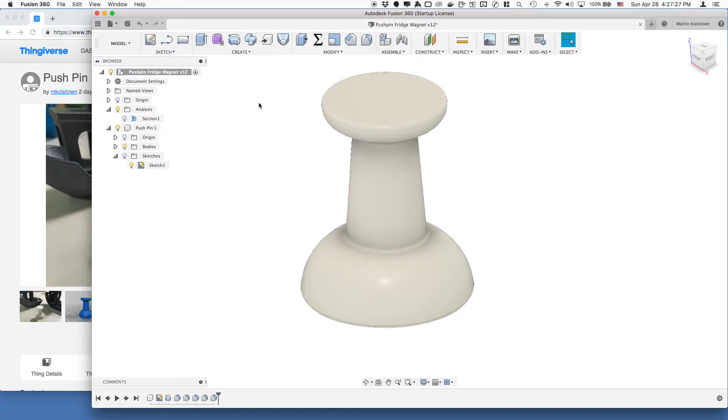So this is it. As you can see, it looks like a pushpin, right? It's a little bit larger than a normal pushpin, about 1 centimeter across the base, and a little bit more for the height. But here it is, it's extra large. This is a cross section just so you can see how it works.

So it's just a bunch of PLA or PETG, and there's a cavity here where I will insert a magnet. I've modified my G-code to stop when it gets to this point, and then I push in the magnet, let it resume, and it builds the rest of the pushpin, and it works great. I've got about a dozen of them on my refrigerator now.

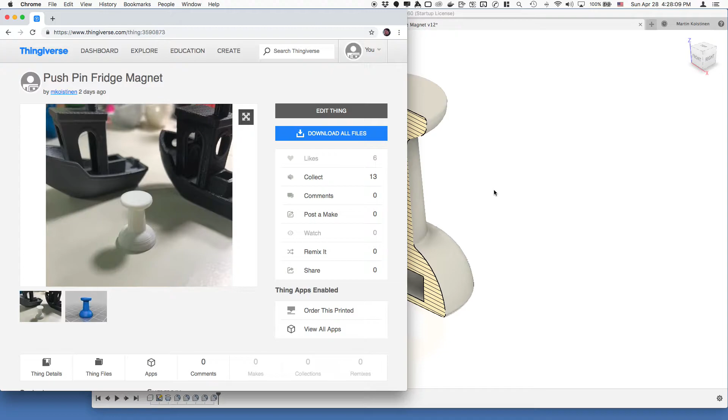The cool thing about this model is that it's small and quick. It's about 1 gram of filament, and when I get close to the end of a roll of some color, I'll just print off a couple of these until it's gone, and add it to my refrigerator collection. Anyway, the interesting part is not all that.

The interesting part, I think, is, I'm just turning this off, and we're going to go to the sketch and edit the sketch. Okay, here we go. So basically, I did this twice, as you can see, and I'm going to show you why in a moment. I started here, like any good, you know, Angus taught me well to make sure that everything's locked firmly in space.

And so this was originally on my origin right here, and I made sure I had dimensions for everything, and I had perpendicular constraints and horizontal and vertical constraints, et cetera, as I needed, and it worked, right? It all was black, and everything was fine. But then I quickly realized, just so you know, all these dimensions came from my micrometer measuring an actual pushpin. So I feel confident that this is going to produce the right shape, and as you just saw, it does.

But the problem is that the actual part is only just a hair wider than the actual magnets that I ordered. So this magnet is going to be about this big. It's a centimeter in diameter, or 5 millimeters in radius, and 3 millimeters in height. So it's really going to struggle to fit in this space. In fact, it can't. And so I knew I was going to have to make it larger, and I was prepared for that from the outset. But the question is, how much? How much larger does it need to be in order to fit the magnet?

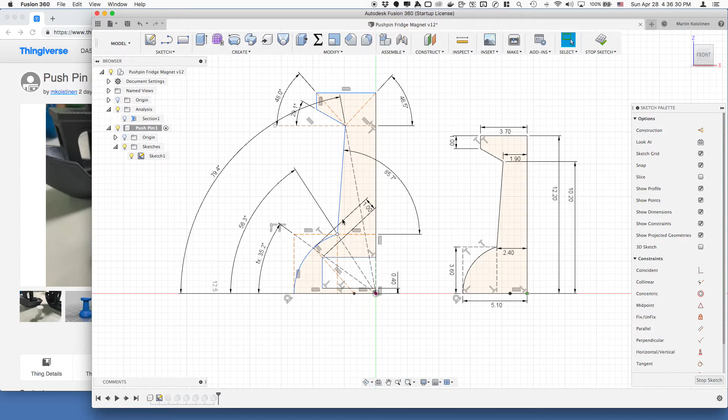So I did this one, this one, this one, this one. And then I also did, using this as an origin, the angle to here, the angle to here, and the angle to here. And then I made sure that all the horizontal and vertical lines are indeed marked with constraints to make them horizontal or vertical.

The only thing that remains is this right here, and I went ahead and used this as an origin and marked that angle as well, using the measurements, the rise, which I think I actually typed in the formula for that.

My machine's running really slow because I'm recording.

Yeah, so as you can see, it's 10.2 minus 3.6, which makes sense. It's this whole distance minus this distance represents this distance, divided by the difference between this and this, which is 0.5, if I'm not mistaken.

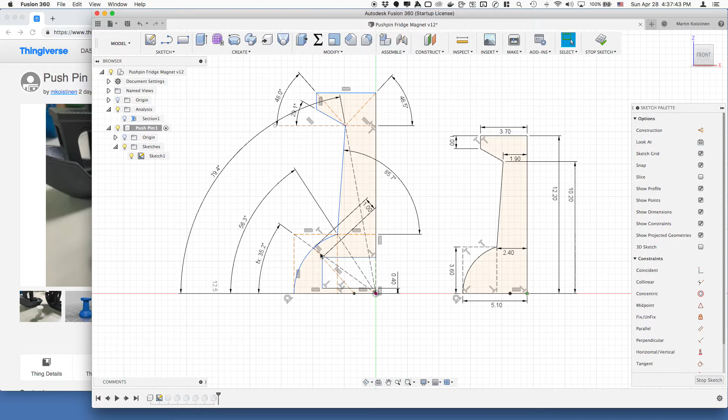Yeah. So anyway, I've got all of these angles declared, and that makes this whole thing scale but not lose its shape, because it's basically a projection of this shape onto this using angles. Now, to create this minimum distance here, I'm going to zoom in a little bit.

What I did is I used this center point of this. This is a 3-point arc, which was constrained as tangent to the vertical. So when you do a 3-point arc in Fusion 360, it will create for you a reference or construction point for the center of that arc, if this was a whole circle.

And so to make this minimum distance, I drew a construction line from here to the corner of my magnet cavity. And then I drew another line from there to the arc, and I made sure that it was parallel to the first. So effectively, this is one line, which represents a radius of this greater circle, right?

So because of that, we know that the distance from here to here, if we set it to 1 millimeter, that is the closest that this point will ever be to this arc, right? That's how we know that. So that serves as a useful geometry, I guess, for doing that.

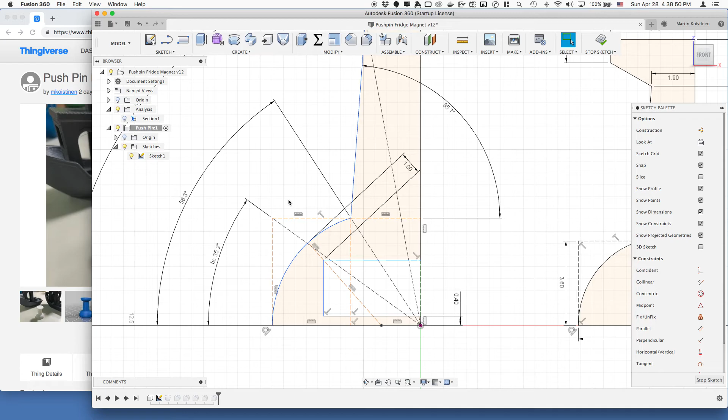Okay, so now we have this projection. We have our constraints of being 0.4 millimeters off the build plate and 1 millimeter away from the edge of this arc. Only thing left to do is to provide the measurements of this cavity. So I did receive the magnets from Amazon, and I did measure them with my micrometer, and lo and behold, they actually came out to the size that they said, which in this case is 3 millimeters.

My machine's going pretty slow. 3 millimeters. I'm going to add 0.1 millimeter tolerance. In my case, my printer is very accurate, and maybe 0.2 will be better for some people, but for me it's 0.1. And I'm going to declare that to be my height, and you can see already that's going to affect the scale of this whole profile.

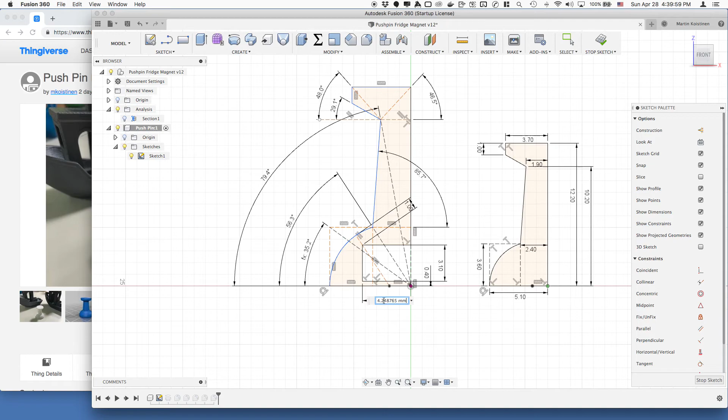And we're going to do the same thing for the radius of the magnet, or half the diameter. In this case, I know it to be 5 millimeters, and I'm going to add the same tolerance of 0.1 to it. 5.1, return. And you can see again, it will change the scale of this diagram.

Now, I don't know what's going on, but for some reason, Fusion still hasn't made these black, and I don't really know why, because it is fixed in space now. Earlier it was painting it black. I think I can trick it by just creating a line that goes from here to here, and then it will lock everything in. But the thing is, that's not needed, and I can delete it.

I love Fusion 360, I really do, but I have to say its performance on a Mac is a little bit lackluster. I'll delete. Okay, so I've deleted that line again, and you can see that it's all black. There's nothing undetermined in that profile.

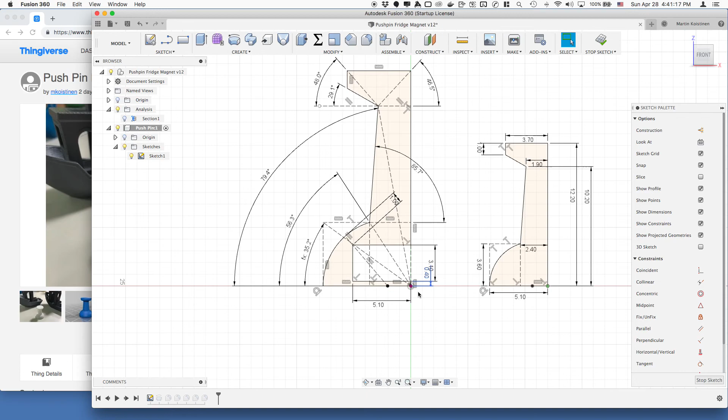And now I know that this cavity, which is big enough to hold the magnets, determines the size of this pushpin, and I know that the pushpin is the smallest pushpin I need to hold this magnet with a constraint of 1 millimeter here and 0.4 millimeters off the build plate. So stop sketch and let's look at our work. There it is.

So that is what I wanted to share with you guys. I know it's not novel in the fact that I'm using constraints. I think Angus has done a great job of helping me and others understand constraints in Fusion 360. I think the novel part of this, and again, I know that other people probably use it, I just haven't seen it anywhere, is using determined angles to create a projection of a shape rather than a fixed number of sides and lengths of sides. I hope that helps you in future modeling.

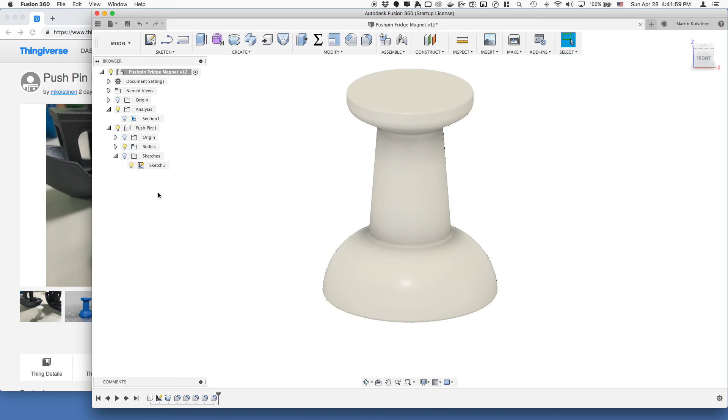So if you want to make your own pushpin magnet, or you have another project that's similar, and maybe you have a different source of magnets and therefore a different size, or maybe you have some magnets lying around that you want to use that already have a specific size, then you'll know how to use this archive and where to put the numbers and why it works the way it works.